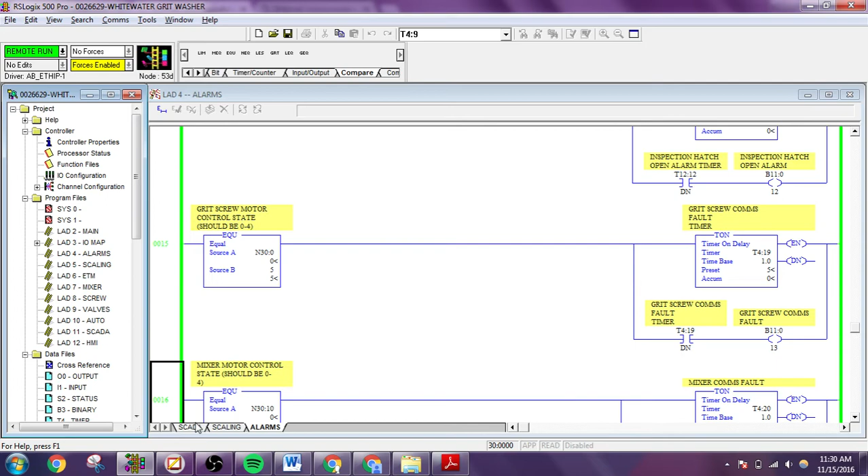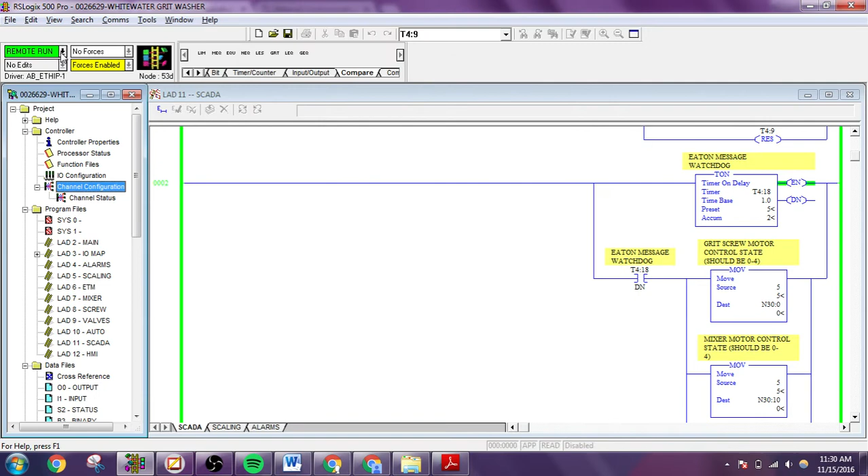So we have a MicroLogix 1400 that we're using, and I have this all set up, so I'm going to kind of work backwards and then show you what I did and why I did it and all that sort of good stuff. So we have the channel configuration, and normally it'll be like this, right? So let's go offline first. Yes, and that's one thing too, is you can't edit anything about messages, or it appears anything in the rung of a message, when you're online with the processor. So that's kind of a good point that it made.

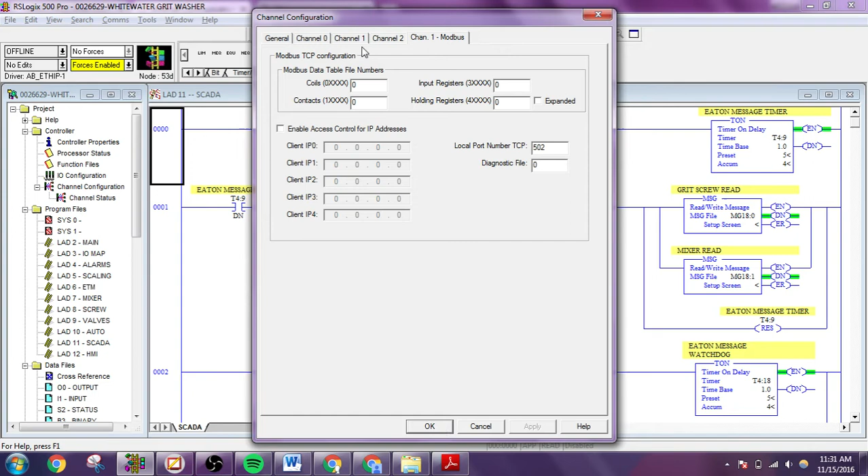So we'll go to channel 1, and usually this is what we have, right? You put in your IP address, you disable BOOTP, disable DHCP, and then this is what you have. So general, channel 0, 1, and 2. So if you click the MODBUS-TCP enable and you apply it, you'll see that another tab pops up. And we don't need to change these. These are for if someone else is going to communicate with us via Modbus, and then we would put in which registers we want. Just make those N files like N20, 21, 22, 23, or whatever you want. And then the local port number TCP for Modbus, this seems to be always 502. Not quite sure why that is, but that's what it is. So we're all good here.

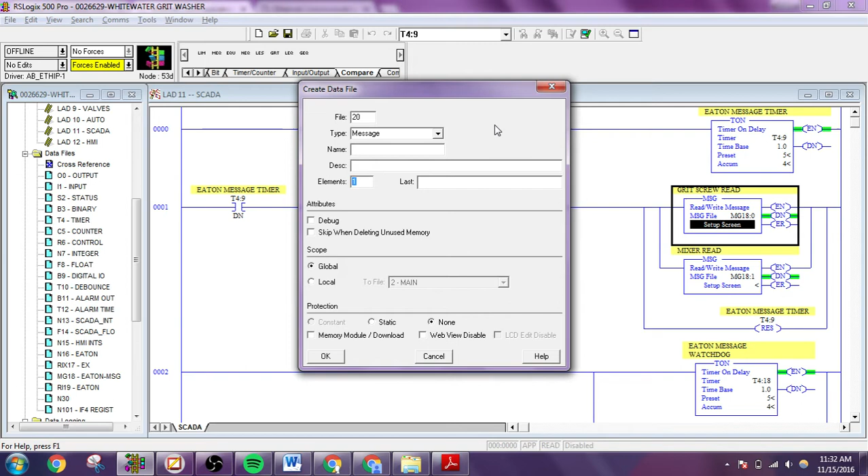And then you can see that I have some logic here. I just got a timer so that we're only reading messages every 5 seconds. And I have two of these Eaton setups, the C440 with a C441 on it, monitoring 2 different motors. So we'll go in here to the setup screen, and as you can see, first I made a message register MG18. We can do that, you see it down here. This will record a bunch of information. I don't really deal with it, but if you go here to the type and you go down, you can see message, and then you can make however many messages. In this case I had to make it at least 2 elements, because I needed 2 motors to be monitored. But you can make it whatever you want. Oops, just delete that guy. So we go back in here,

and we'll see. So this is our first message, MG18.0. Here you can configure it however you want. Once you check that Modbus mark, you'll be able to do MODBUS-TCP, and then out of all the options here, we're going to do the 3, read holding registers. I'm not really familiar with the other registers right now, but you can see we have the familiar 40,000 for the Modbus. That's standard for all the registers in Modbus. So we're going to pick that guy. Then we choose the data table that we want to read the information into. In this case, I put it as N30 and 5 elements, and we're going to do 16 bits, so that's 1 word of data per.

And you'll see that some of these parameters are double words. So I haven't really messed around with changing that yet. For what I'm doing for amps, it's just 1 word, so I'm good with that. So we'll see MB data address. We'll get that from the manual in a second. The unit identifier, not sure what that is, just left it at 255. Things worked. The routing information file, that's another one that we'll have to make. So you can come up here and click new. And if you go down here, you'll see routing information. And again, you can make as many of those as you want. And so I chose RI19, and then we have the Ethernet address of the device that we're talking to through Modbus, and then again port 502 because that's just what Modbus does.

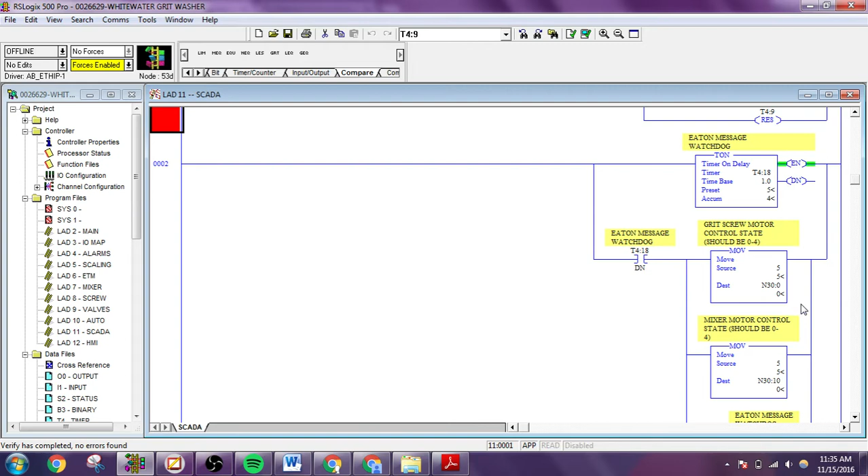So we have those, and then down here we want a watchdog as well, so I'm going to move a value of 5 into a certain register. This register, you can see here, is the motor control state. It's usually 0 through 4, so every 5 seconds, if we're communicating properly, there will be a 0 through 4 that moves into here depending on the status of the motor. For this particular application, I'm not using that motor status, but obviously you want to move into a parameter that you're not using, because if you're using it and you move something to it, it can mess up your program logic.

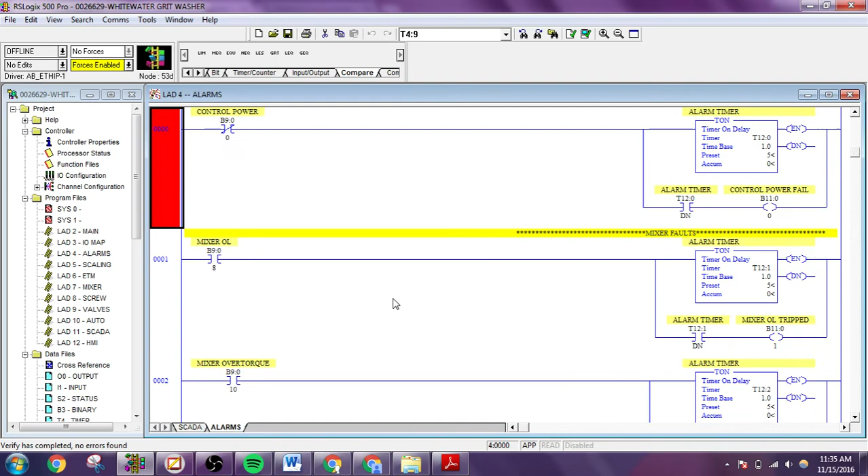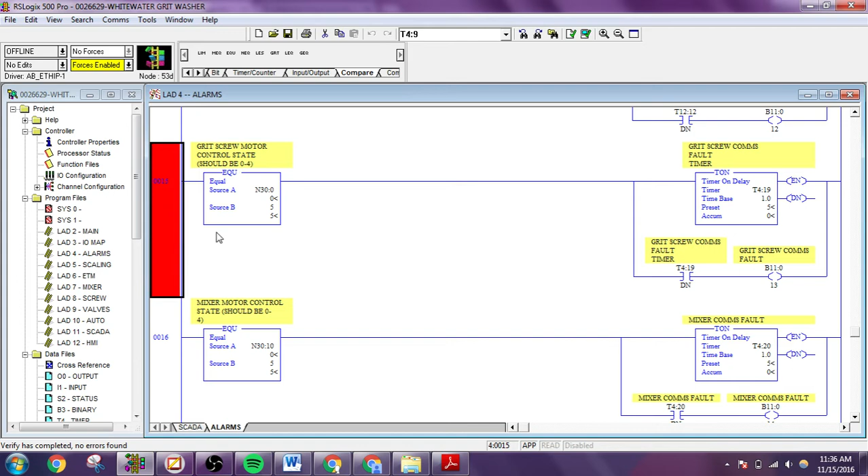We have the reset, and then also I have an alarm that says if we have the value of 5 for more than 5 seconds, then we get a comms fault, and that makes sense. If the PLC itself moves a 5 into that register and something else doesn't replace it in 5 seconds, that means that it's not communicating. We can also test this out when we go online with it, and I'll show you how we can test that in a second.

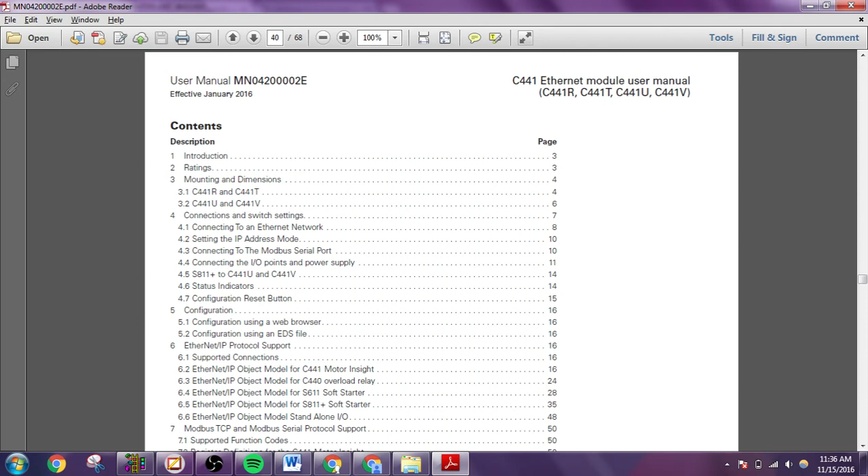So if we go back here, we had MB data address 300. So how do we determine that? Well, I downloaded the data sheet for the C441. On this, it's going to list different devices. So we're going to scroll down. I believe it's page 40. No, it's not page 40. 54.

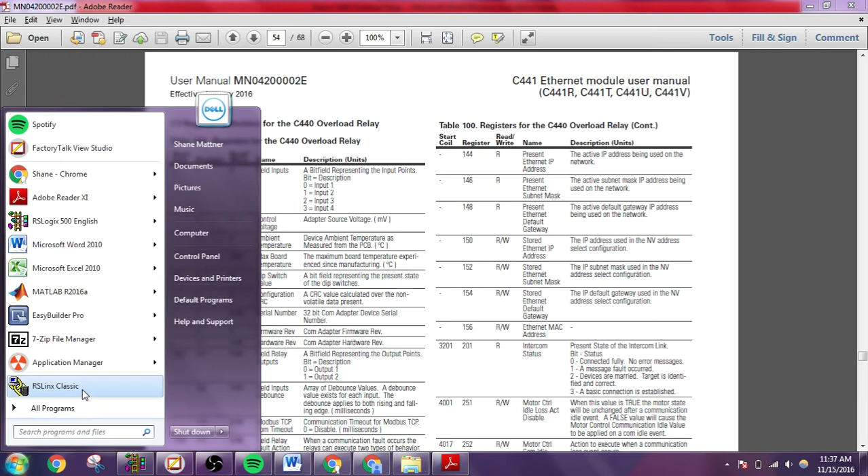And here you'll see register definition for C440 overload relay. There's also different devices. If you scroll up, like this one, C441 Motor Insight, and it has a bunch of different stuff listed. So you've got to make sure that we are looking at the proper device, because the C441 takes on the identity of whatever the first device it connects to. So if we go to RSLinx, we can see in here that these are identified as C440s, even though we're connected technically to a C441 Ethernet module.

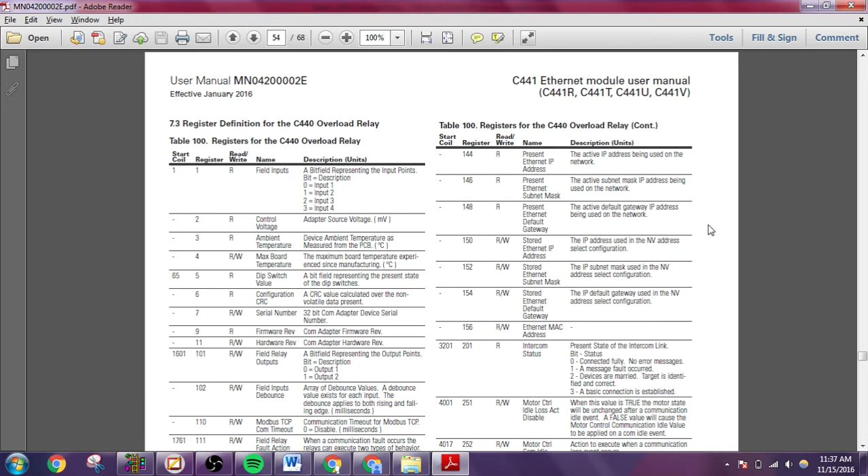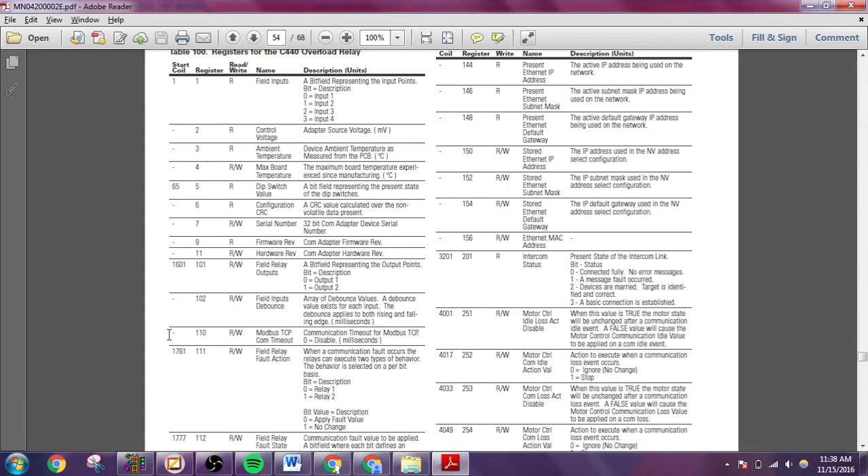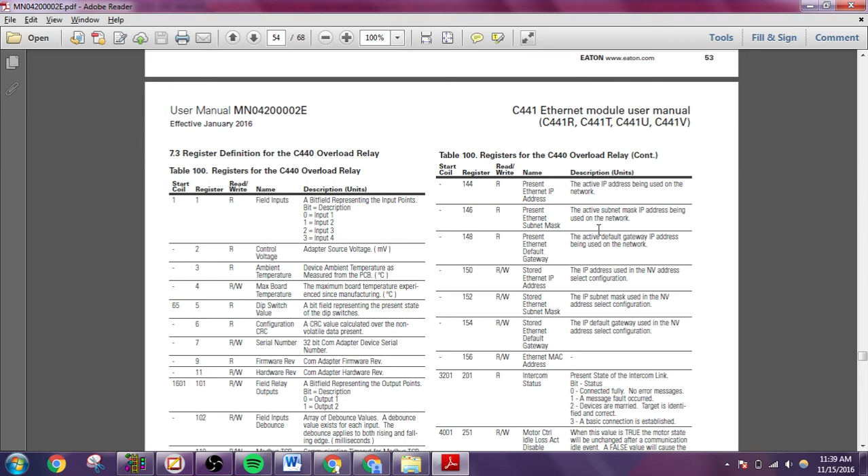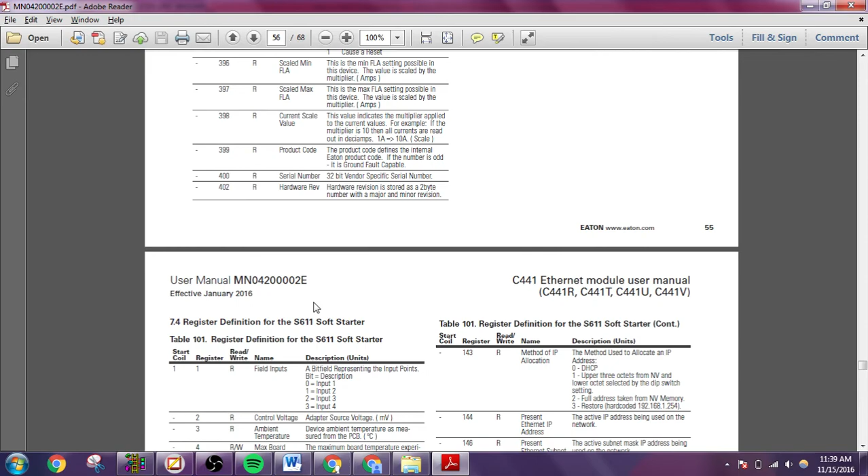We could call Eaton, I guess, and ask them if we really wanted to, but all we need to know is that these register numbers are what we're looking at, and then you could write to certain registers if you want to, the name and description. So again, using the data sheet to determine all this, and we can go down and you can see everything that you can monitor with this particular device through Modbus. And that's how we got that.

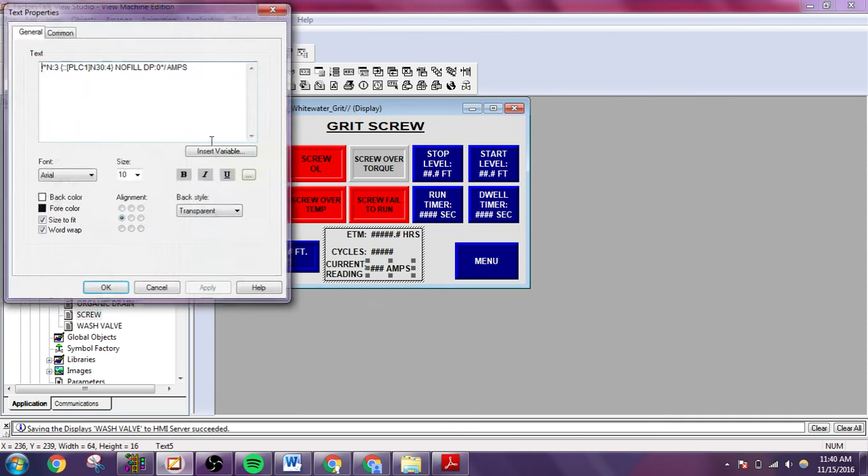So now if we go to register N30, we can see I only put a few labels in, but I labeled this guy what it actually is. The motor control state should be 0 through 4. That's going to blink to 5, and then it should change back. And then we'll see that N30:4 is what I actually wanted, the screw current reading. And then I made the other one, N30:14, the mixer. So then I just put those directly on the screens here as N30:4. So it's just going to read from the device into the PLC and from the PLC into the screen directly.

And that should be about it. I haven't actually connected a motor to this guy yet, so I don't know what kind of format we're going to get, if it's going to be just a rounded off integer of the amps, or an integer file where it has an implied decimal somewhere, which we could just take whatever it gives us when we hook it up and scale it accordingly, multiply it, divide it, whatever we need to do in order to get the right format and pass it over to the screens. I might have to do a floating point instead of an integer, but that's no problem.

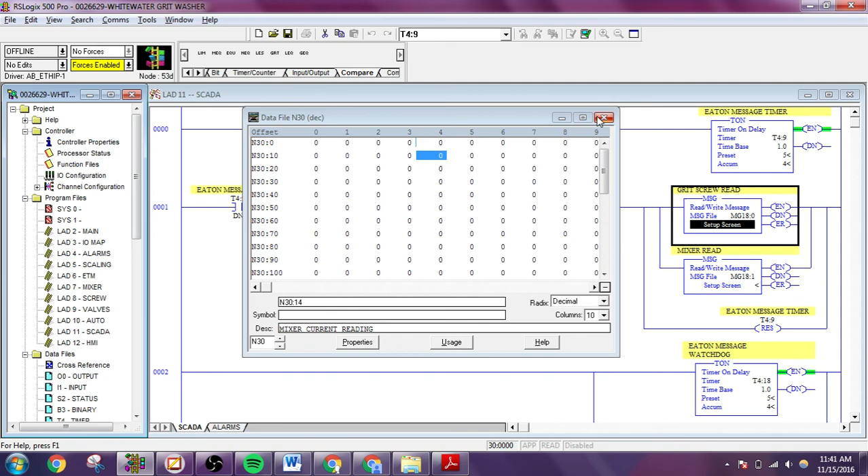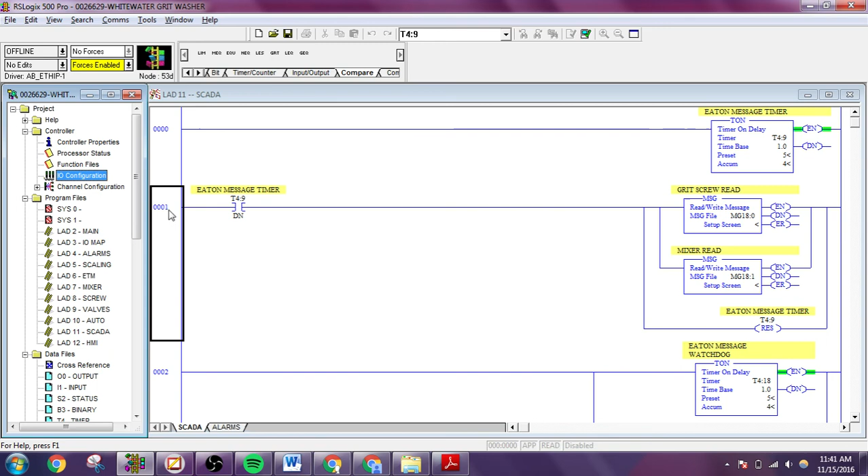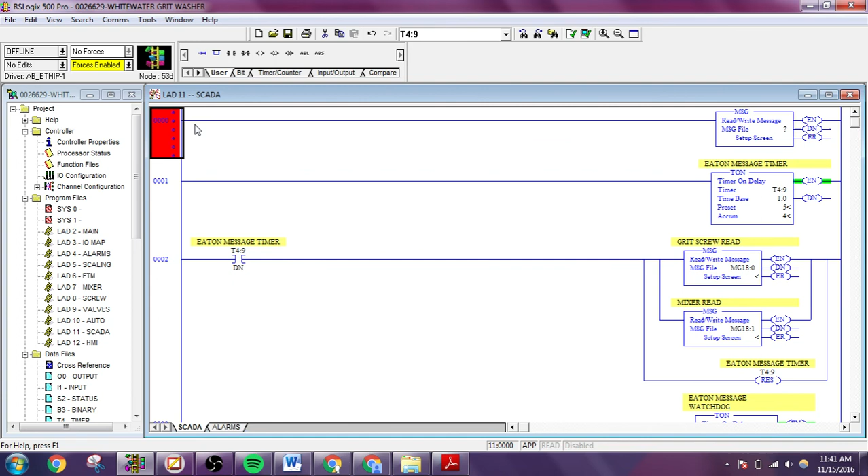So that's the basics of setting up Modbus for the C440/C441. Before this I tried for days to set up an EtherNet/IP CIP generic message. I can show you that real quick, even though you shouldn't use it. Let's see, MSG, blah, blah, blah. And we're going to go to integral. Channel 1 is always Ethernet. And here we did the CIP generic. And then it gives you a whole bunch of options.

So I set these up based on what I found in the manual and talking back and forth with Rockwell and Eaton, and just nothing was working. So Modbus is a lot easier. It just has a certain number of registers. You find which one you need and plug in the numbers. So that's how we got this one done.